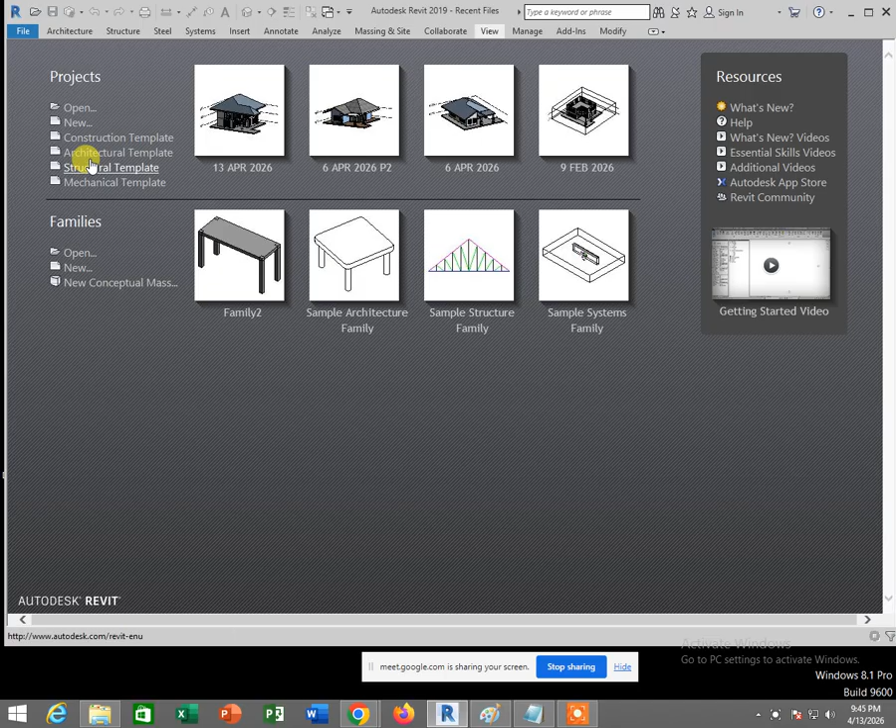Okay, so basically kalau you nak buka satu architecture template yang baru, you akan klik architecture template atau you klik new. You pun boleh klik new, okay, dan you boleh pilih architecture template. Lepas tu you klik okay lah.

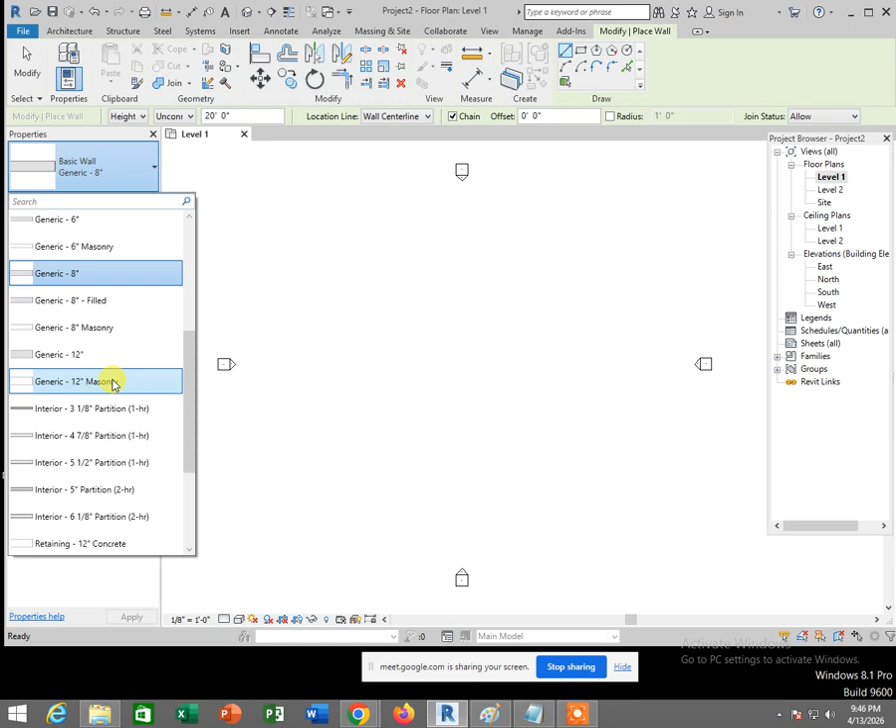You klik okay. So kat sini nanti memang I akan terus draw dekat level 1. Okay, and then I guna wall architectural. I guna generic 12 inches masonry yang ni. Okay, so I guna unconnected. Tapi yang ini units dia memang dalam inci tau. So I tekan escape dulu, tekan escape dulu.

Okay, I click manage tab, I click project units. Okay, and then I change my length to millimeter. Okay, and then I click area square meter. Okay, volume cubic meter. Okay, dia punya angle dengan slope decimal degree. Klik OK, ni pun klik OK juga.

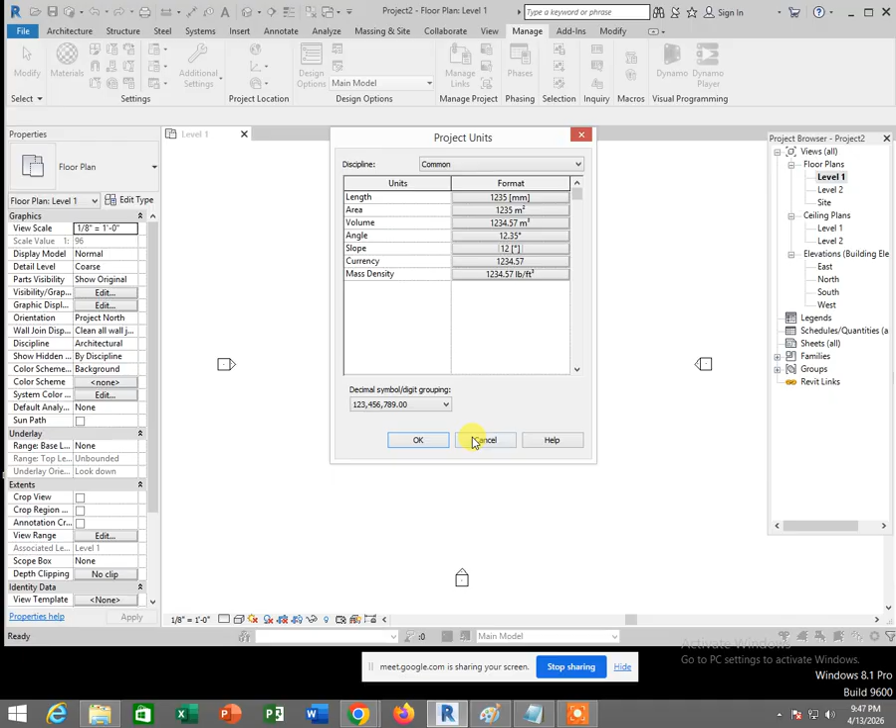Okay, so sekarang ni I klik architecture tab, I klik wall architectural. Okay, I pilih generic 12 inches masonry ni, I pilih unconnected. Ni I dah set dah ketinggian dia 3000. Okay, so I buat lebih kurang dekat sini. Panjang dia tadi kan 10,000.

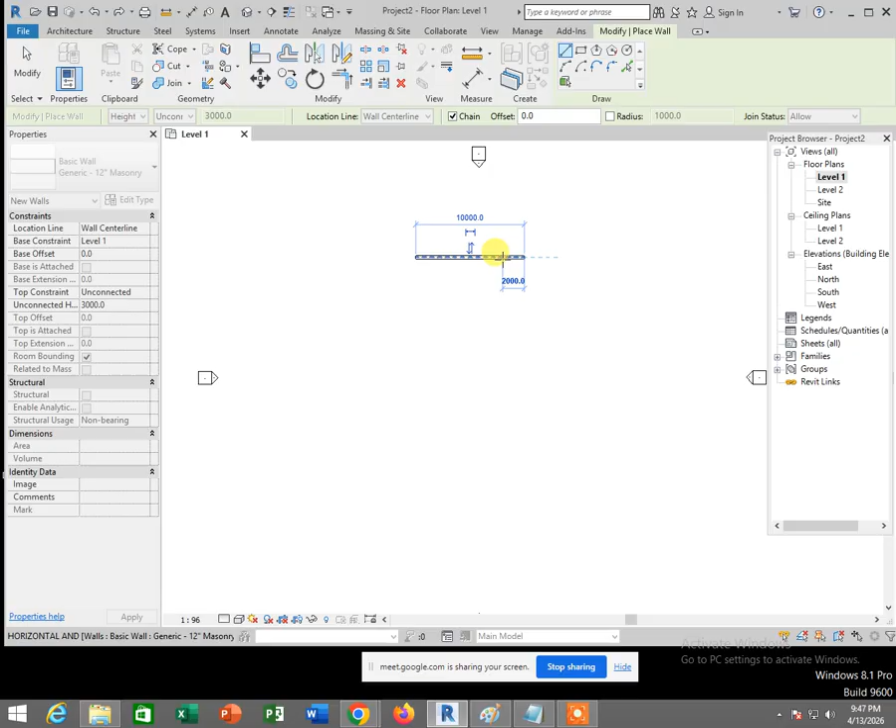Klik dekat sini tadi, polar track 10,000. Dia punya lebar kat sini tadi ambil 6 meter. Okay, bahagian porch ni I ambil 4 meter tadi. Okay, ini pun 4 meter juga. Okay, ni I boleh guna object snap track. Klik sini dan klik sini. Tekan escape beberapa kali lah.

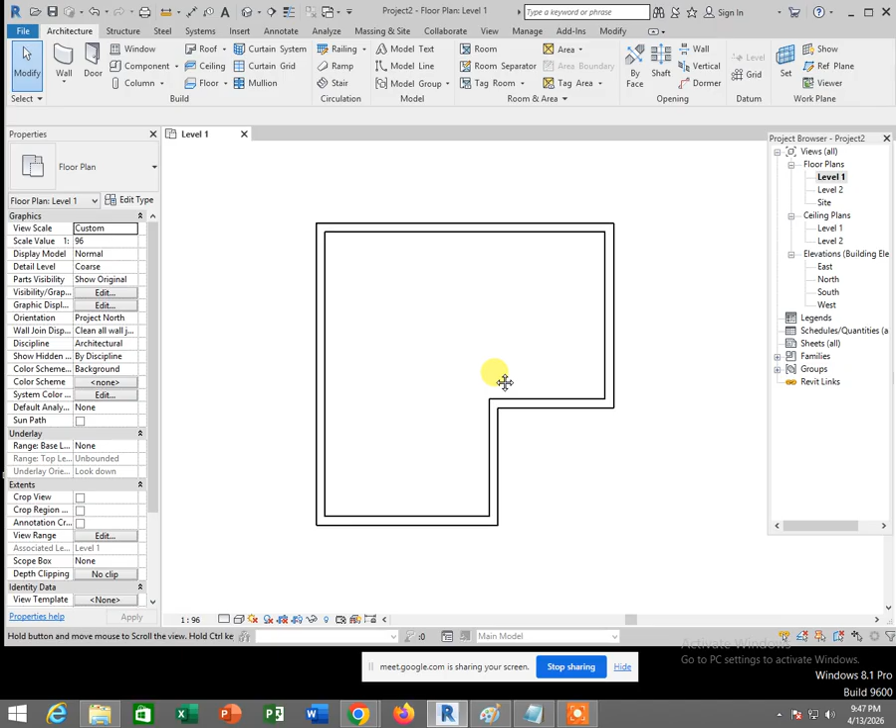Okay, kalau you nak keluarkan ukuran dia, you pun boleh klik annotate. Klik dimension align. Okay, and then you can go to the midpoint, mid or center line over here to center line over there. This center line to this center line. Okay, this center line to this center line. You can pull out its dimension, this center line with this center line. Okay, this center line with this center line. This center line to this center line.

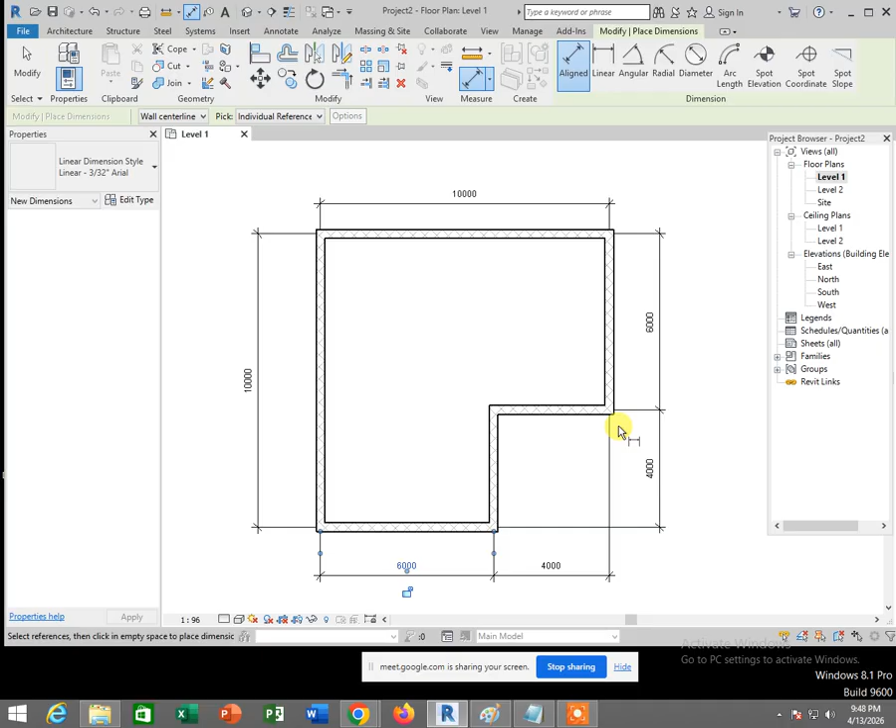Okay, press escape. You can even change its scale down here. Like if you choose 1:50, it becomes like this. If you choose 1:100, it becomes like that. If you choose 1:200, the dimension will become bigger. Nampak tak? Dimension dia will become bigger.

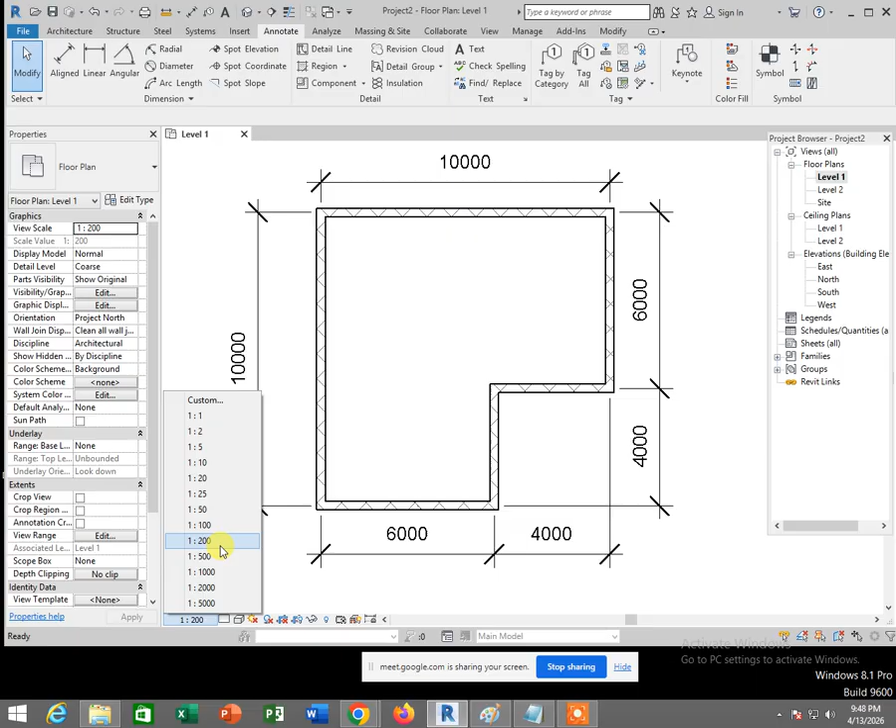Okay. This is just to see its dimension lah. Okay, I can select this and delete. Okay, select this, delete. So kalau I nak tengok dekat pandangan 3D, I klik button 3D house button ni. Okay, so dapat tengok pandangan ni. Okay, kalau nak tengok visual style conceptual, boleh buka ni, pilih conceptual. Ataupun shaded.

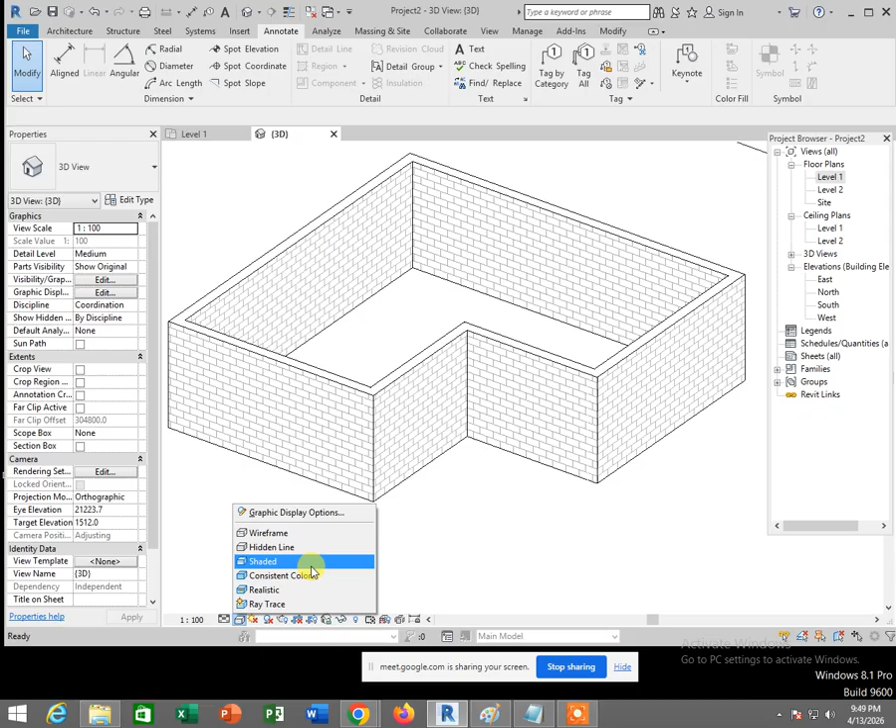Shaded. Okay. Okay, so I nak buat pintu, so I double click level, I nak buat floor ni. Double click level 1. Okay, nanti I klik kat architecture tab, I klik floor architectural. Okay, nanti I klik generic 12 inches kat sini, I pilih pick line.

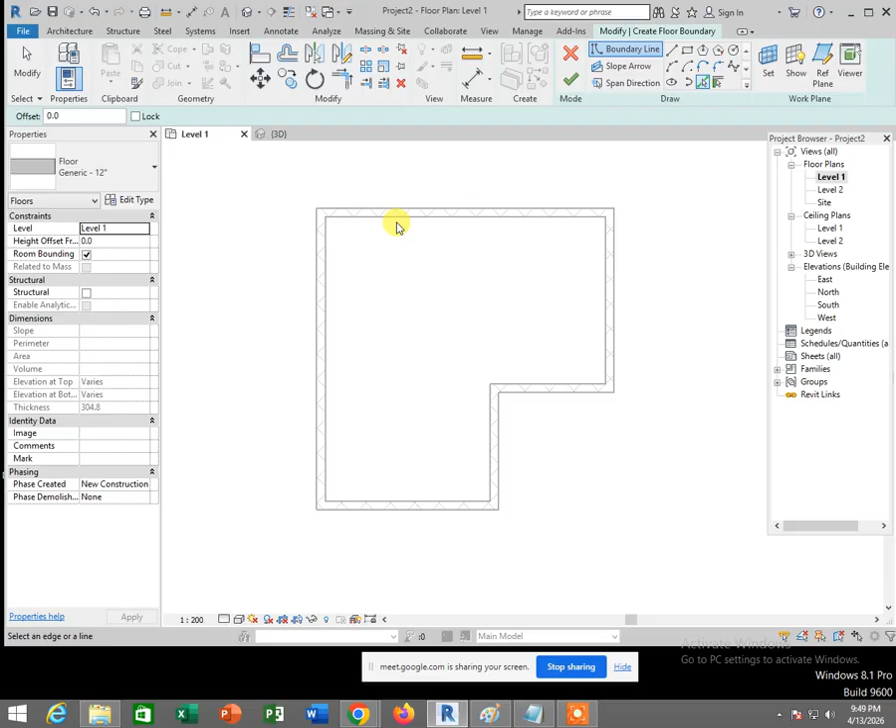Okay, offset dia kosong, offset dia kosong. Klik dekat dalam dinding tu. Klik kat belah dalam. Okay. Kalau dah settle tu, boleh klik yang tick hijau tu. Okay, klik yang tick hijau tu. Okay, nanti boleh klik balik semula floor architectural.

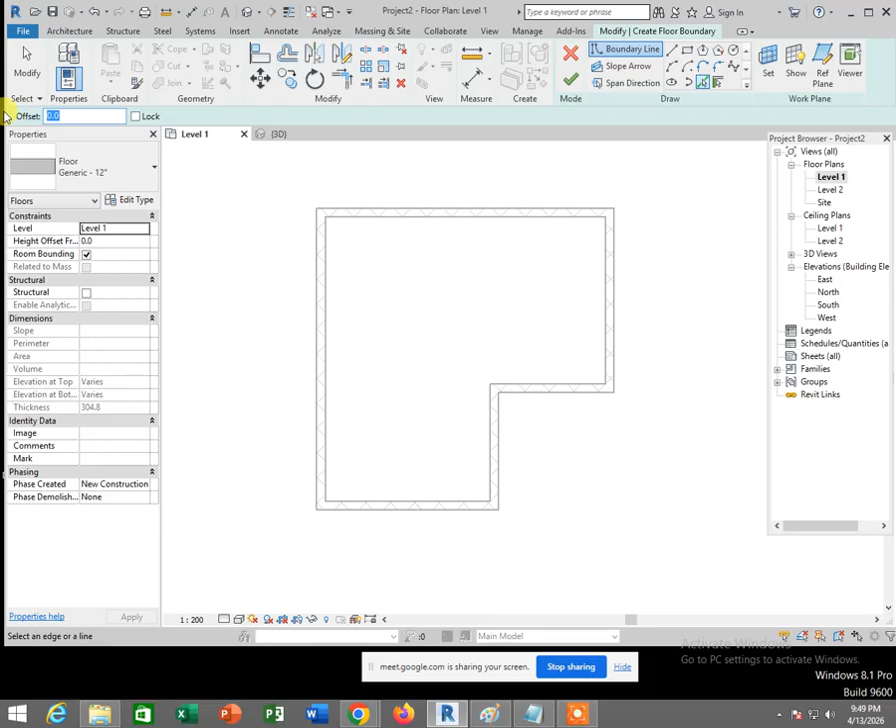Okay, klik yang pick line ni. Tapi yang ini pakai offset, so kita nak buat dia punya floor perimeter. Ataupun floor apron dia lah. Okay, dah settle buat yang ni. Tekan escape 2-3 kali. Tekan escape. Baru klik pick line. Yang ini offset dia kosong. Okay, dan buat kat sini satu.

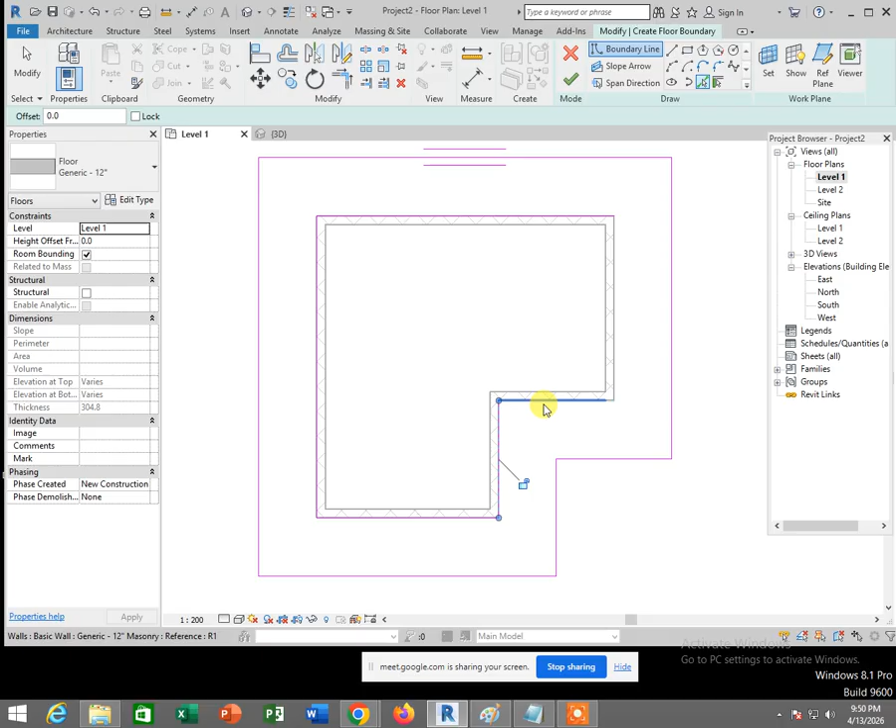Okay, so kalau dah settle ni, you tekan escape. Lepas tu klik tick hijau. Okay, so you dah dapat dah floor bahagian luar. So sekarang ni you nak buat dia punya pintu kan. So you pergi dekat sini level 1. Okay, lepas tu you buatlah pintu dia kat sini. You boleh klik door. Okay, you boleh klik door. So door dia dekat properties ni dia memang ada bagi door, tapi door dia limited.

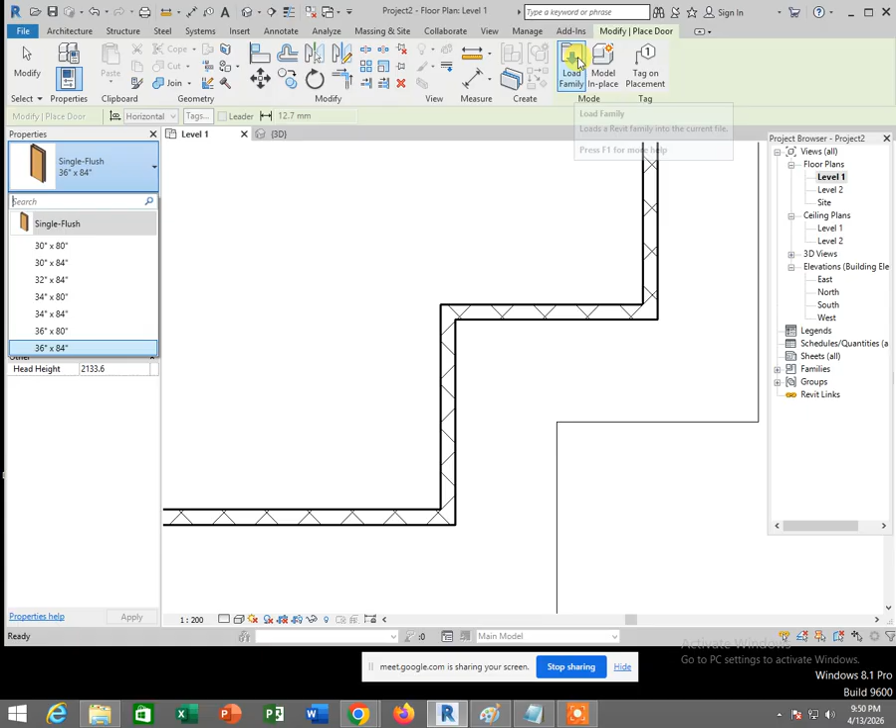Jadi kalau you nak door yang lebih modern daripada library component, you got to click load family. Click on the button load family. And Revit will bring you to this location, C drive, program data, Autodesk RVT 2019 library. Okay, so let's say I choose library, and then I go to either US Imperial or US Metric. I go to US Imperial. Okay, I go to door. Okay, door, and then I go to door commercial, whichever door that you want.

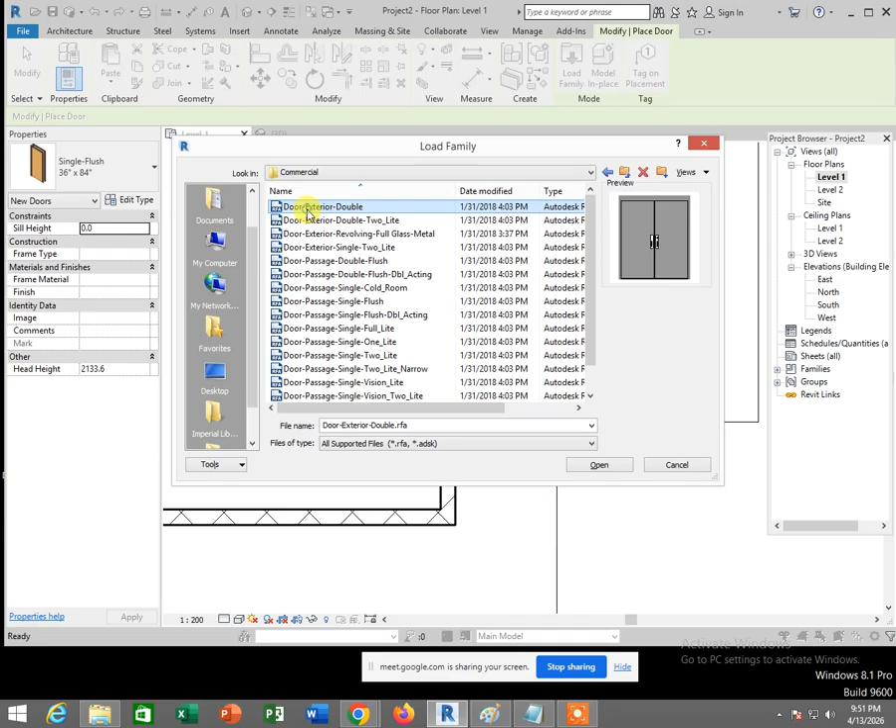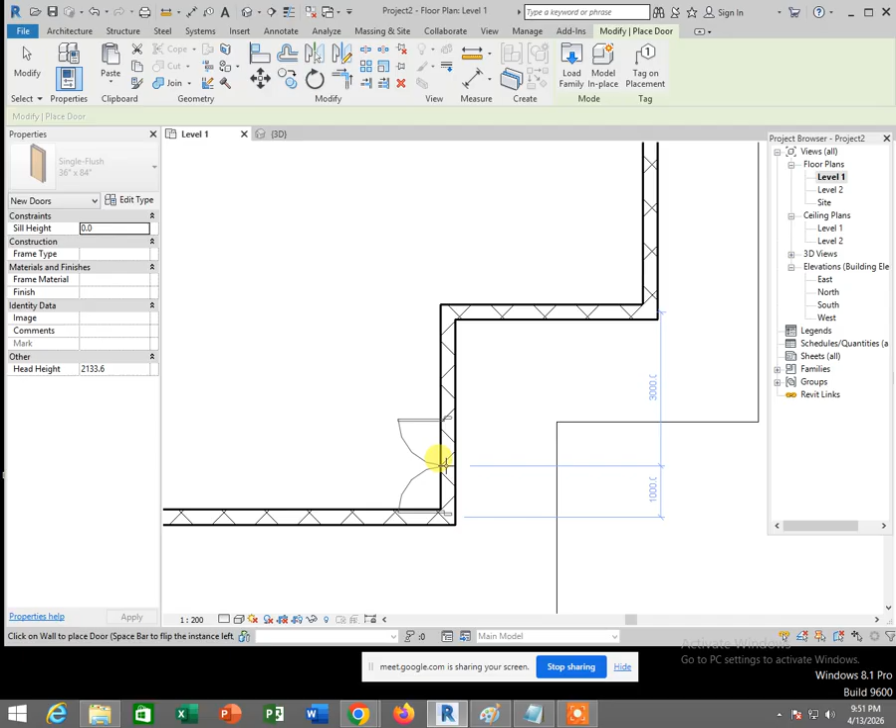Door commercial boleh. Okay, door residential boleh. Residential pun ada door. Banyak jenis door lah dalam ni. Okay, ni pun cantik juga. Tapi I go to commercial door, let's say, and let's say I choose this one, double click. Okay, and then I put the door here. Of course, you can readjust back the door later. Okay, this one is for door entrance. This one is for door exit.

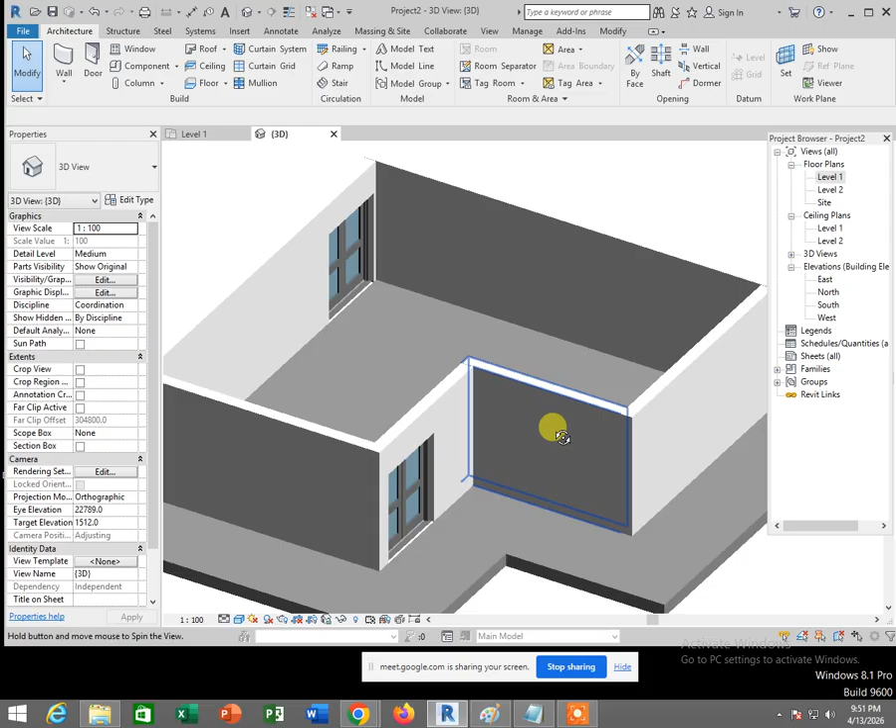Press escape. Click the 3D house button on top, so you can push it. You can drag your mouse, right, to orbit it. Press and hold on Shift key while pressing your mouse scroll wheel, and move your mouse.

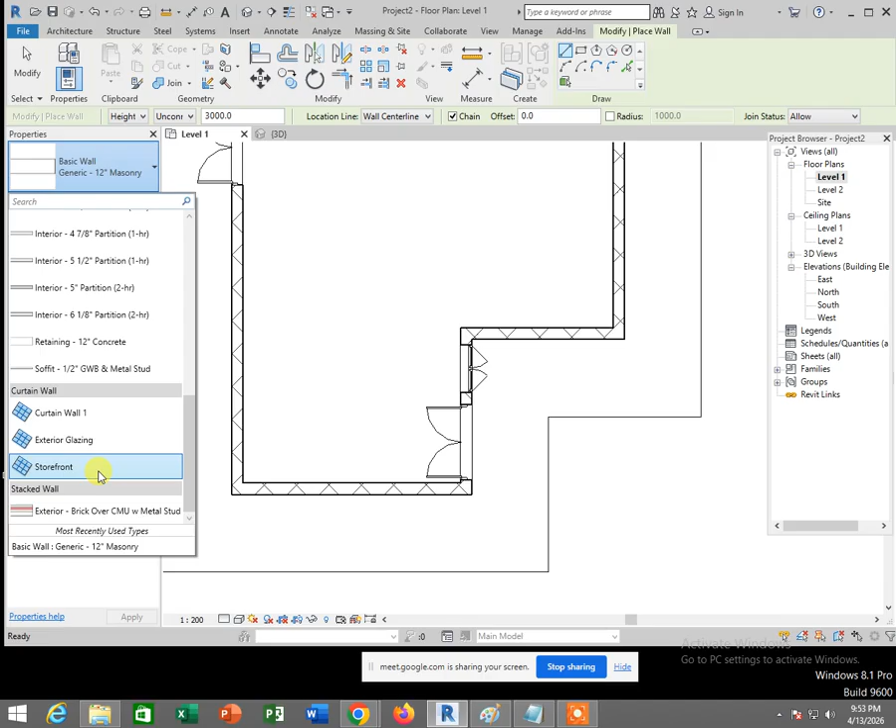Press escape. Click the 3D house button. So I got this.

Click the green check mark. Would you like to attach? No. Would you like to attach? No. Click the 3D house button on top. So I got the second level floor. There, that's my floor already.

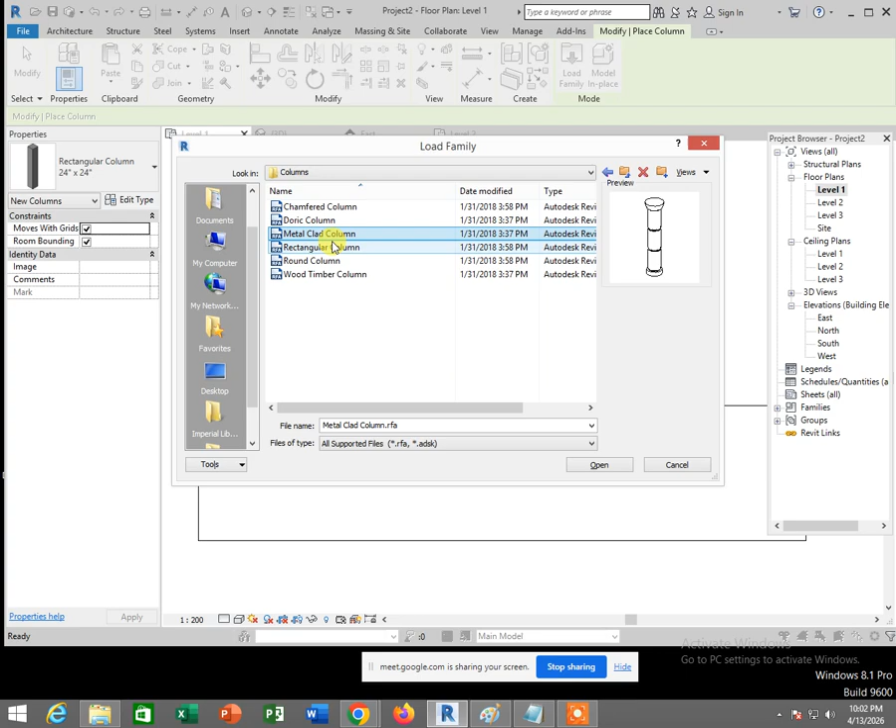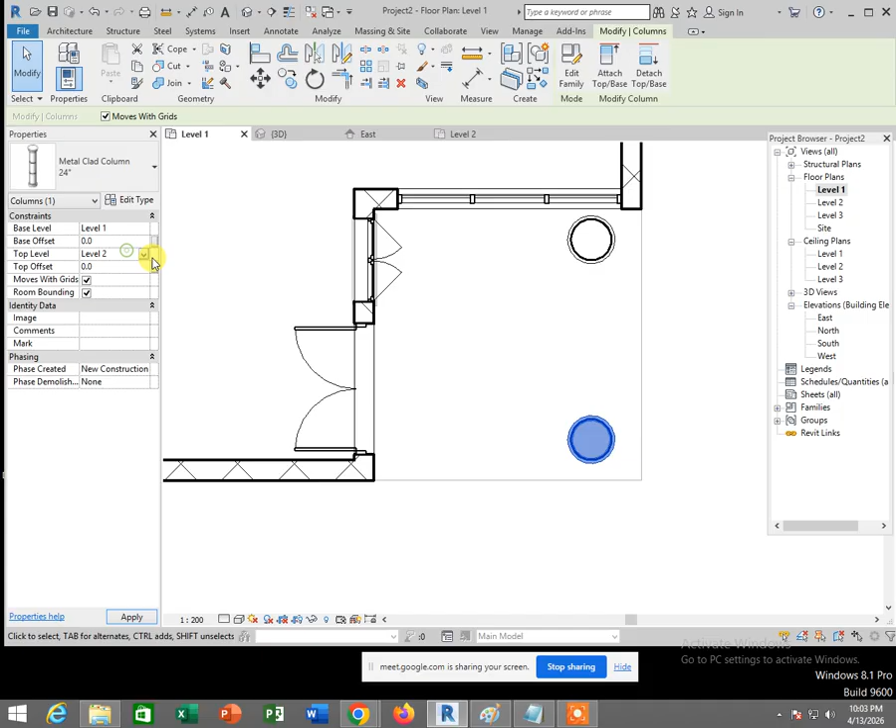Ini top level dia tu sebenarnya up to level 2. So I tukar dekat properties dia, so nampak, kat sini I dah bawa masuk 2 architectural column. Okay, cumanya sekarang I nak buat dia punya tangga, dia punya stair.

Tapi you punya floor yang ni you kena edit dululah sikit. I klik edit boundary, I go to level 2. Tadi memang I ada ambil offset, I pick line, I memang ada ambil offset dalam 3,500 milimeter. Okay, then I offsetkan dia menjadi macam ni.

Tapi I kena trim, tekan escape, I kena trim. Jadi bila you nak trim, kena klik button trim, dan you kena klik pada segmen yang you nak. Macam I nak segmen ni dengan segmen ni. Jadi I klik kat segmen yang I nak. I nak segmen ni dengan segmen ni, dan segmen ni. Yang mana tak nak tu delete.

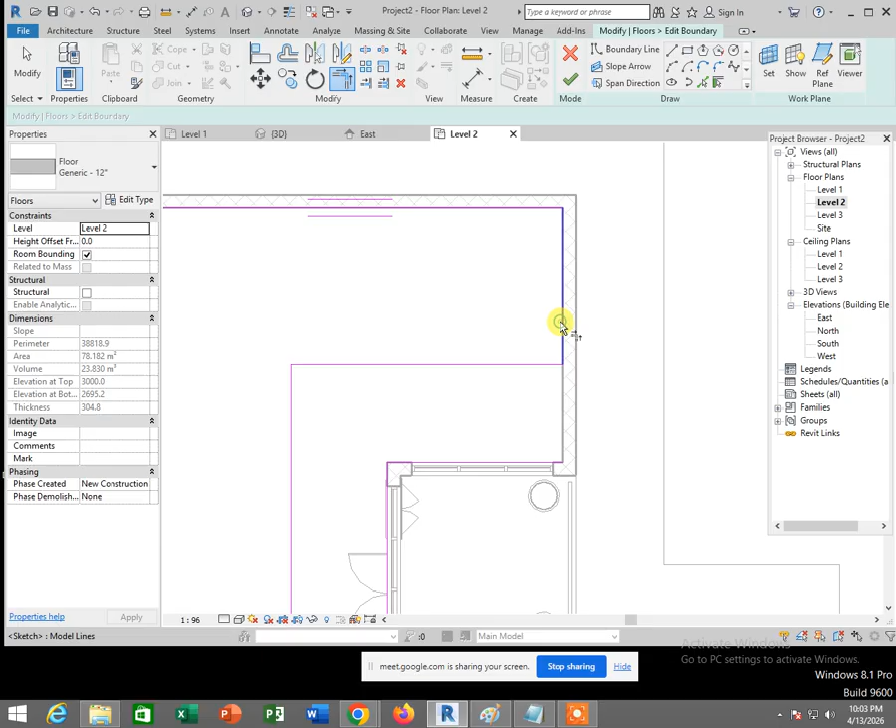Okay, bila I klik tick hijau tu nanti dia jadi macam ni. Would you like to attach? No. Okay, so sekarang nak dah adjust dah dia punya flooring dia tu, nampak?

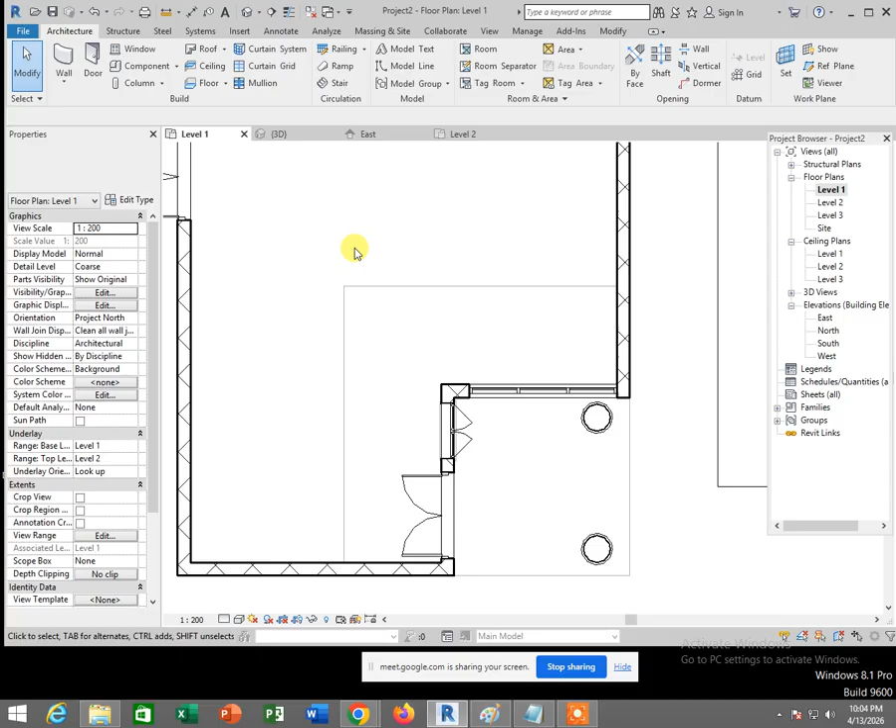Nak buat dia punya stair kan, dekat level 2, level 1. Buat kat level 1. Nanti I klik dekat architecture, I pilih stair. Dia ada macam-macam stair tapi I pilih run straight stair.

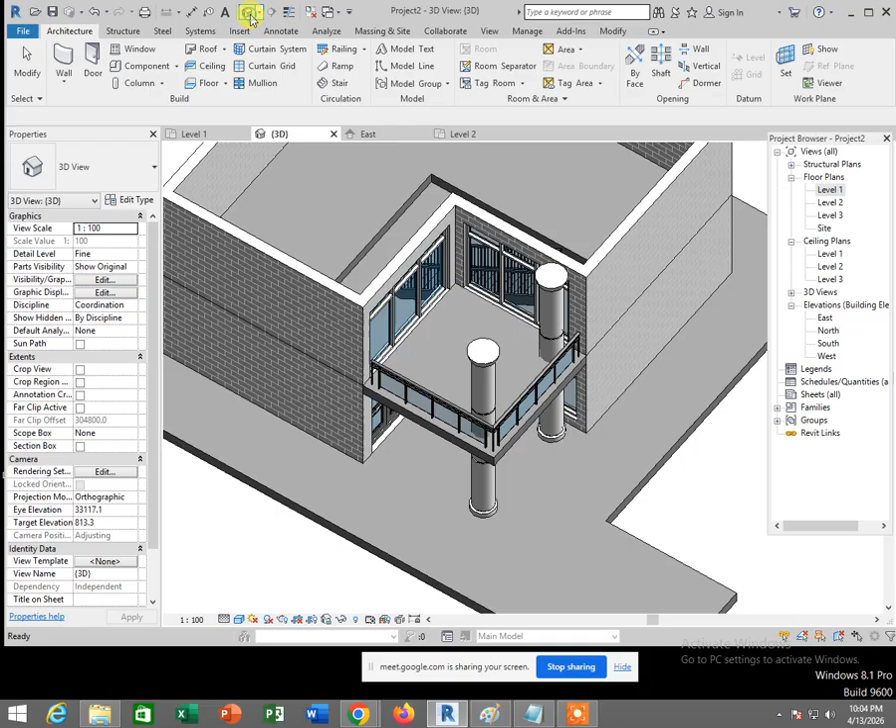Daripada sini straight away maksimum dia lah. Okay, escape, tekan escape beberapa kali, tekan tick hijau. Tapi kalau you klik dekat 3D view button ni, you boleh tengok dia terbalik tau. Nampak dia terbalik, dia terbalik.

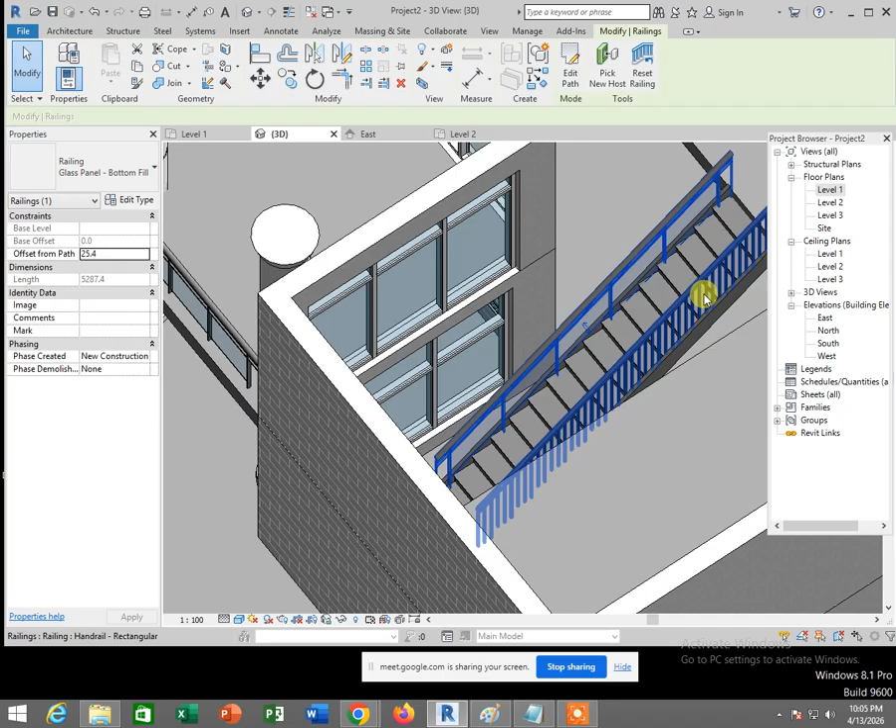You select stair tu, klik edit stair, lepas tu you klik dekat tools ni, pilih flip. Nampak dia flip kan. Klik tick hijau. Okay, cumanya I pun nak gunalah railing ni glass panel juga, baru nampak modern lah kan.

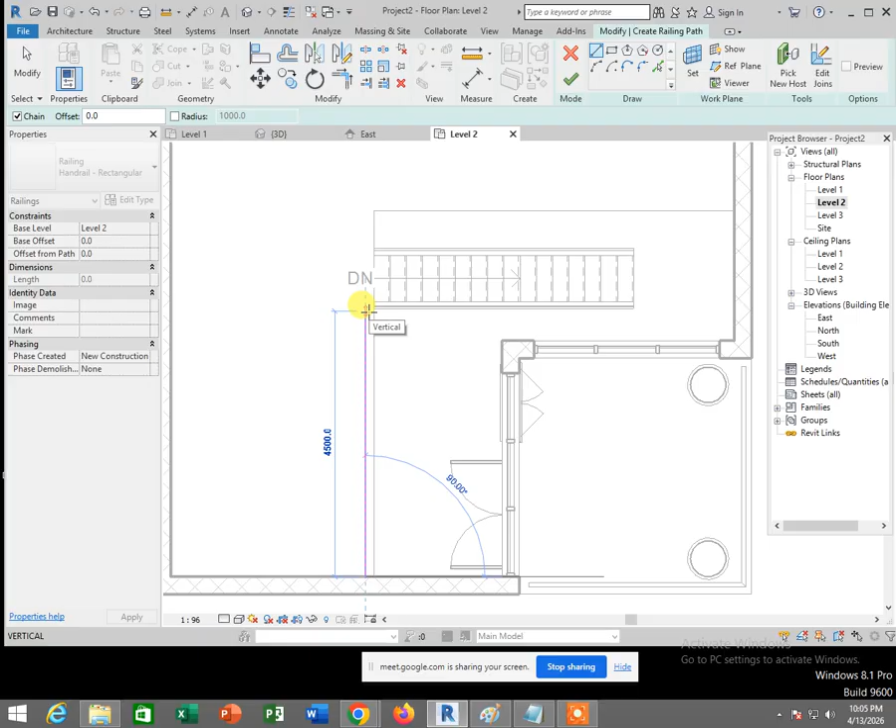Okay, so nak buat railing kat atas tu kena buat dekat level 2. So kena buat satu-satu, klik architecture tab. Memang nak kena buat railing sketch path ni satu persatu. So I dah sketch path, I pilih line. I buat daripada sini katakan sampai sini, sampai sini stop, escape. So you kena habiskan ni dulu.

Kena klik tick hijau dulu, baru you boleh buat yang kedua. Okay, sketch path ni, I daripada sini ke sini, sampai dah sini. Escape, klik tick hijau.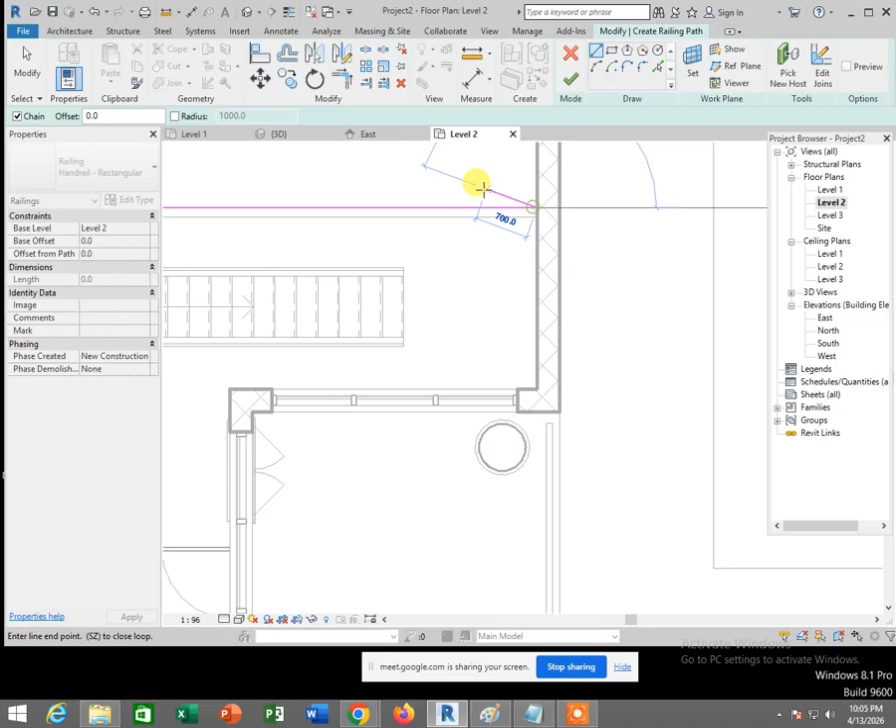Okay, nanti klik 3D house button. So railing tu I memang dah buat. Cumanya I nak jadikan dia glass panel lah. So I tukar kat sini.

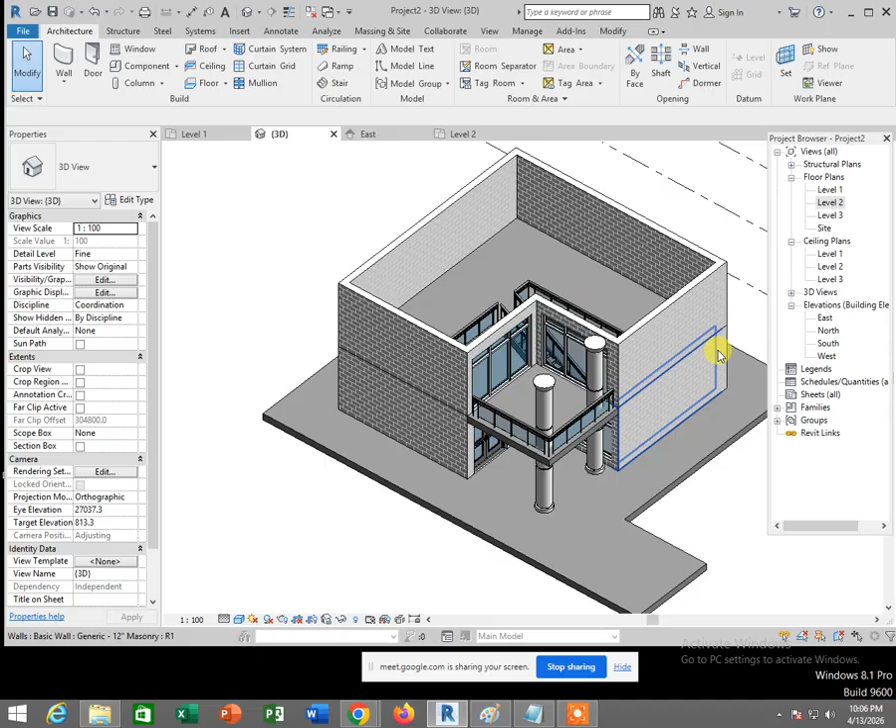Okay, so nak buat dia punya roof tadi tu, tadi I tunjuk you kan, I buat dia punya roof tadi, I pergi kat level 3 dulu. Okay, lepas tu level 3 tak nampak apa. Lepas tu I pergi kat view range, I klik edit, so I pilih semua unlimited.

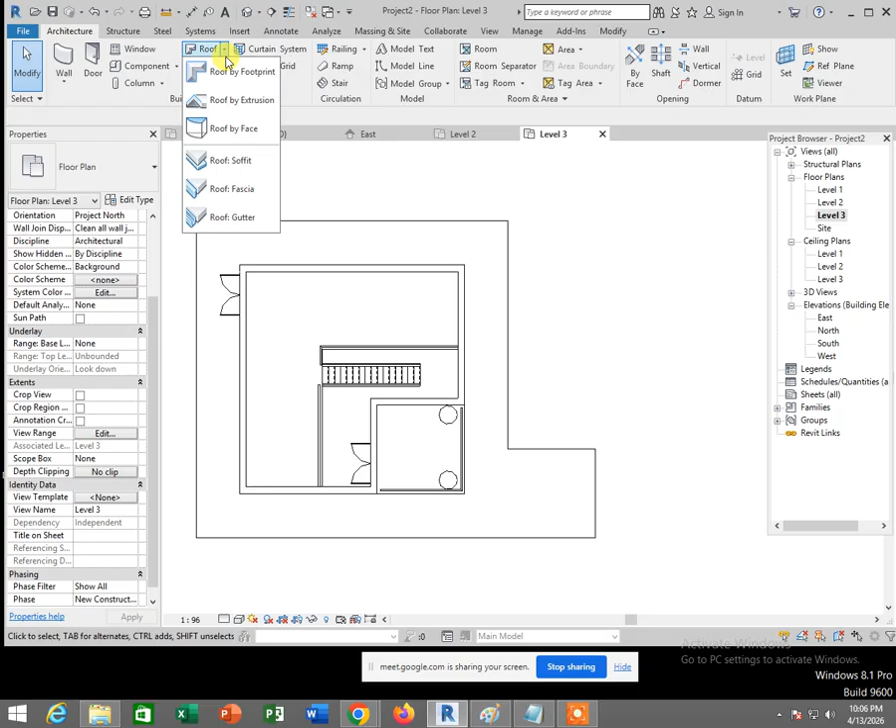Okay, klik apply. So baru I pilih roof dia kat sini, I pilih roof by footprint. Nanti I ikut je dia punya floor perimeter, I guna pick line. So I pick line kat floor perimeter dia. Okay, nampak I ikut je kat floor perimeter dia, lepas tu I klik tick hijau. Would you like to attach? No.

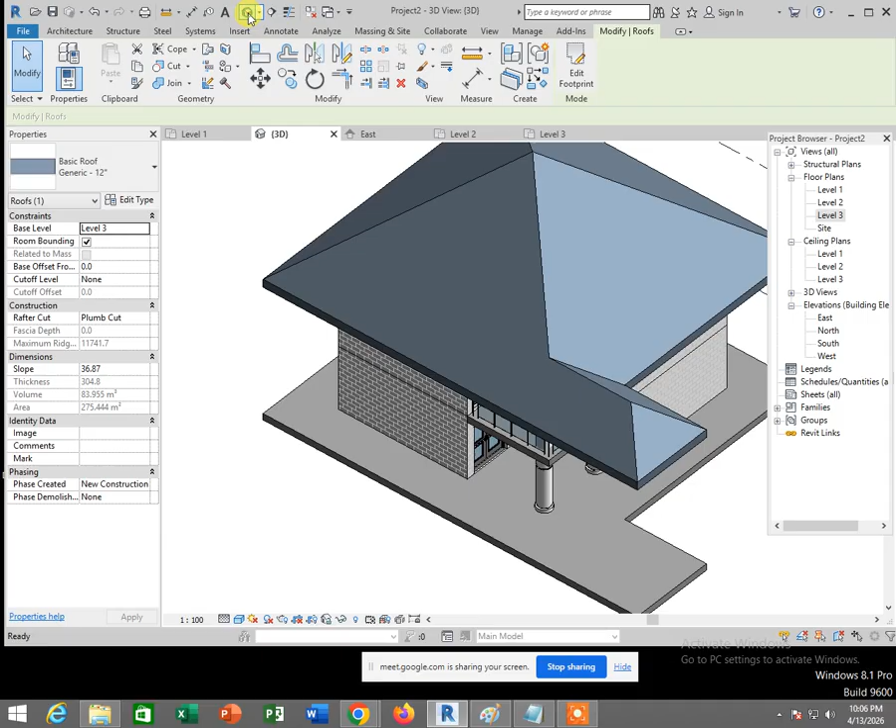Okay, nanti klik dekat 3D house button ni, nampak. Okay, yang ini pun boleh kacau lagi, you boleh edit lagi dia punya pitch ni kan. Nampak tak, pitch dia punya tu. Nampak I boleh adjust dia tinggi ke rendah ke, nampak kat situ kan. Macam tu, okay, so dia dah dapat macam ni, nampak.

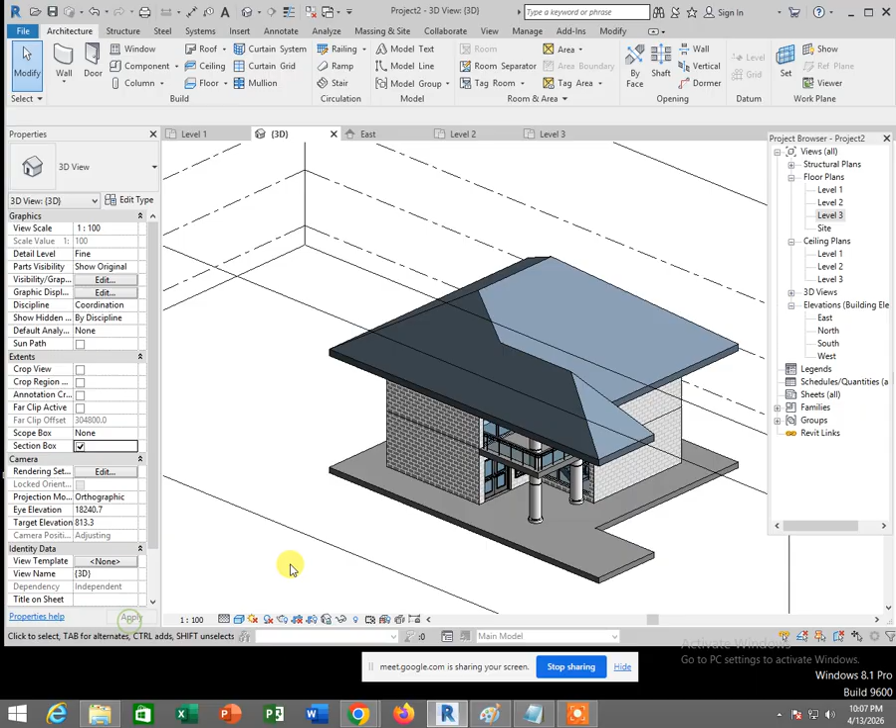Kalau nak tengok dalaman dia tadi tu, memang I ada tekan section box on tadi. Apply. So you can adjust this section box if you want to do sectioning lah. Okay, see.

Dekat properties ni, you kena on section box. Okay, you kena on section box, baru nampak.

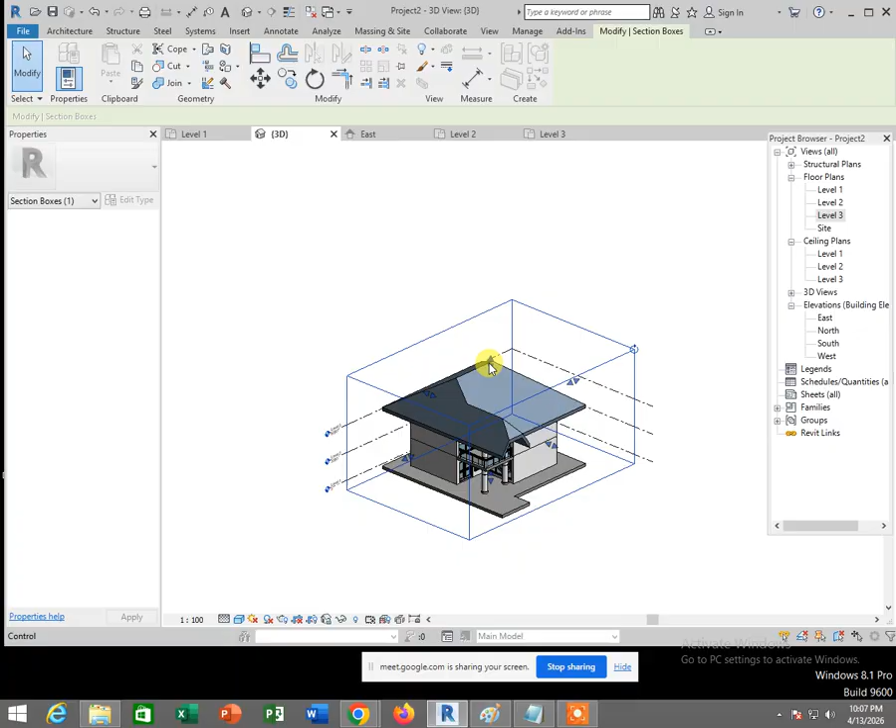Macam yang I demo, dia boleh tengok video rakaman ni nanti. Okay, nak sectioning macam ni pun boleh, nak sectioning macam ni pun boleh. Okay, nak sectioning bahagian atas pun boleh, okay, jadi macam ni.

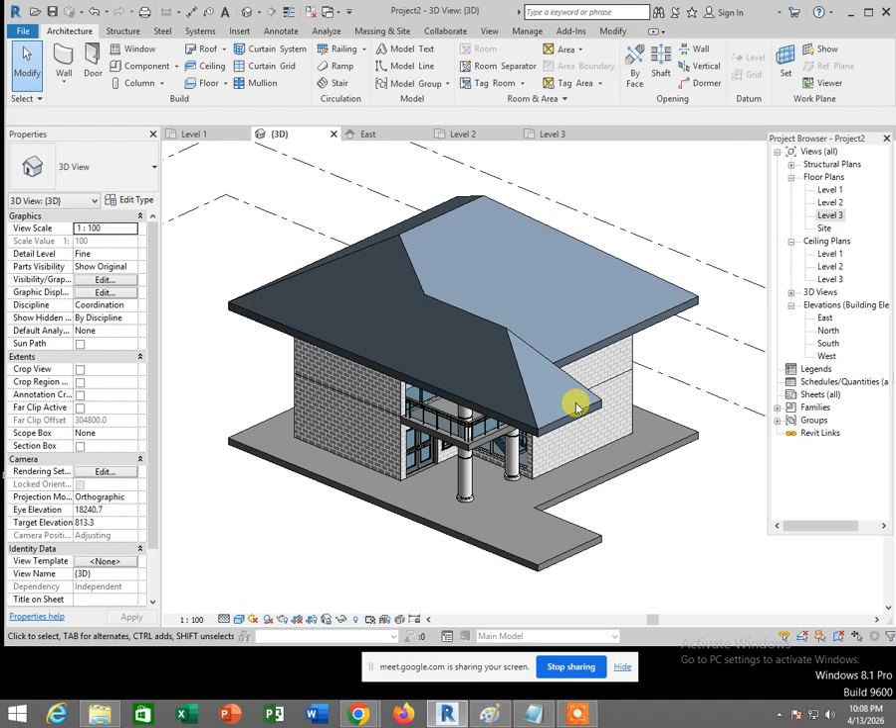Okay, kalau you nak bumbung ni terbuka, you nak adjust ni bumbung yang tertutup kan, ni jenis yang tutup yang ada slope. Kalau you nak bumbung tu tak ada slope, you boleh klik edit footprint.

Okay, nanti you just select this segment, go to level 3. You don't want this segment to have a slope, you can just select this segment, right? And then you just uncheck or you untick define slope.

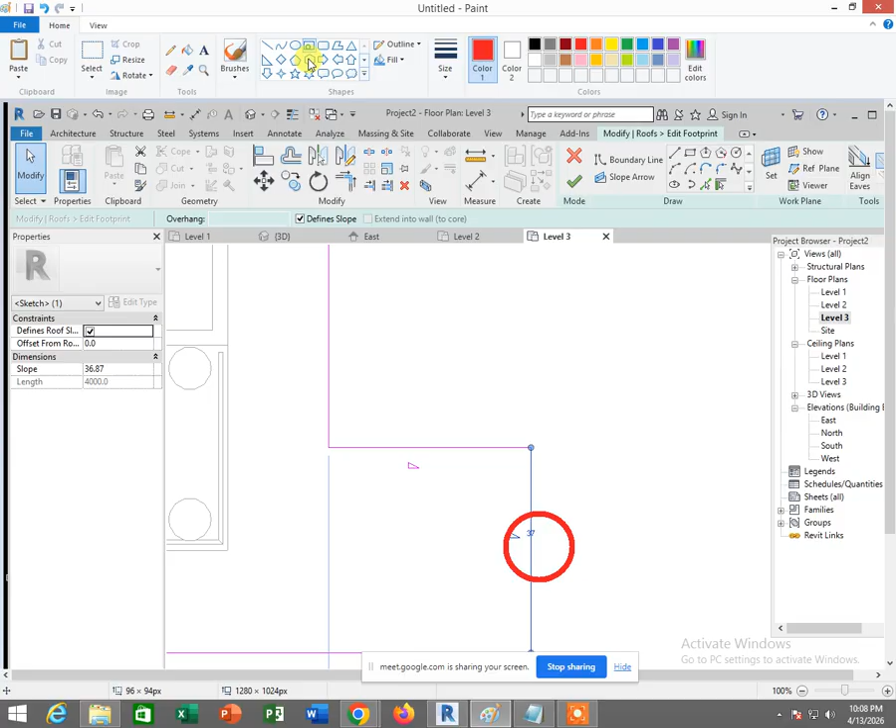Okay, you uncheck or you untick Defines Slope and the roof will have no slope. Dia akan terbuka and roof tu akan terbuka. So klik macam ni, ni select kan, Defines Slope off, klik tekan tick hijau. So nanti dia akan jadi macam ni. Tengok, nampak? Nampak tak?

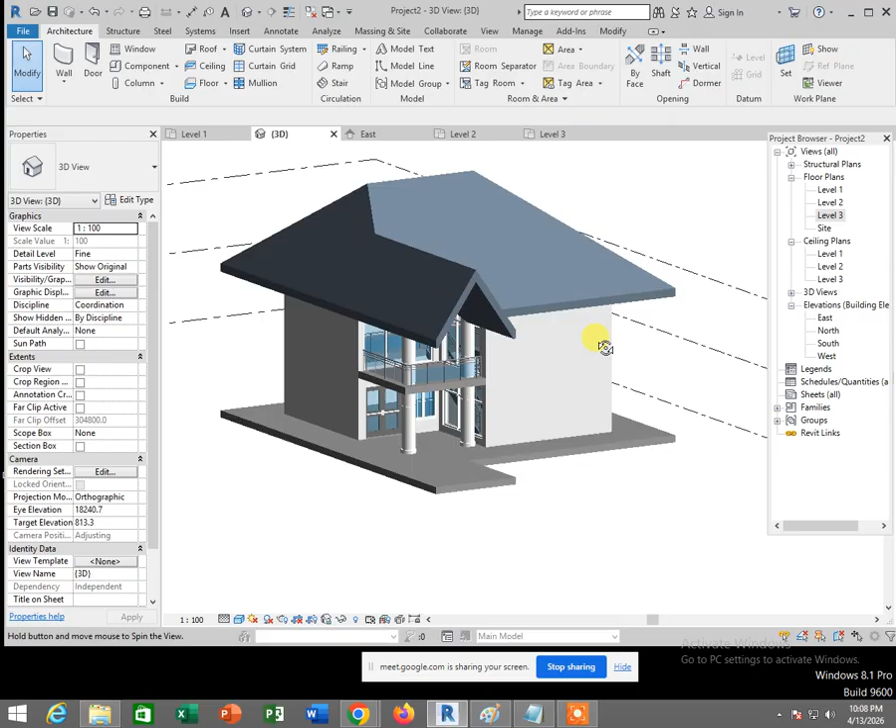Tapi you nak jadikan dia rendah sikit boleh, baru lawa, tu tinggi sangat kan tadi. Nampak? Dia jadi macam tu. Okay, nanti boleh tengok video record.